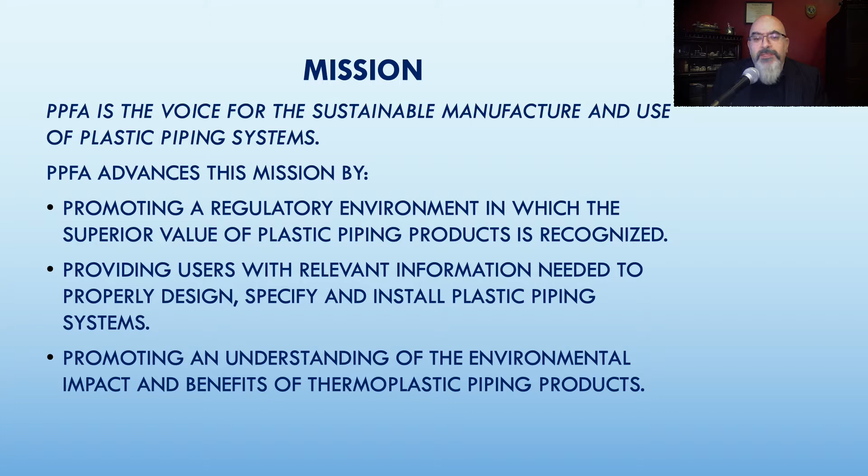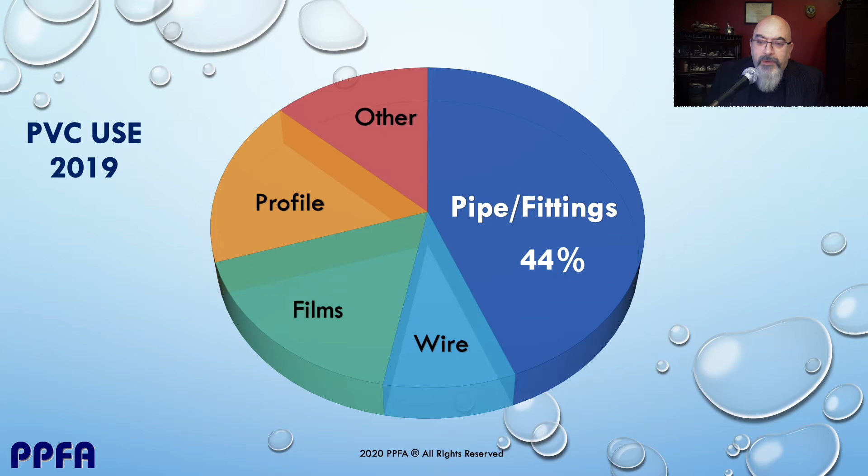Plastic piping is a major long-term sink for PVC and other plastic resins, using nearly half of the PVC in the U.S. PVC as a material is perfectly suited to this application. It allows for a precise extruded rigid pipe with quality solvent welded joints with numerous advantageous properties. With continuing interest in recycling and growing interest in the circular economy, it is certainly worth exploring for our industry. There are both issues and solutions.

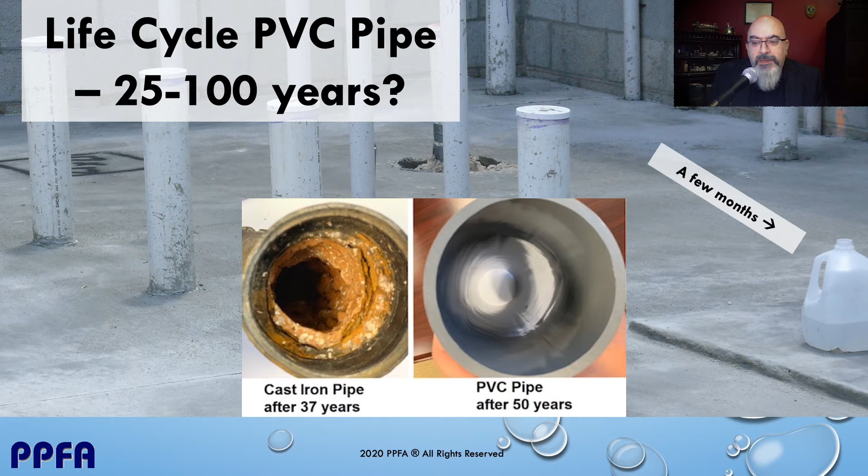PVC piping compositions also have a relatively rich, consistent, and simple thermoplastic formulation, as the product must perform under literal pressure for decades, and much of it is utilized to convey high-purity drinking water. As such, it is a highly regulated and certified PVC product with only a few well-understood ingredients and not much variability.

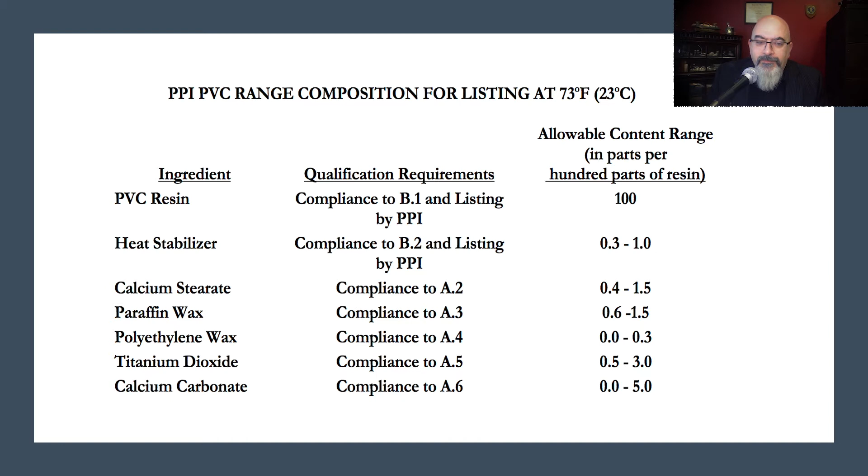This leads to a simple thermoplastic recyclable material consisting of mostly resin and some simple fillers, approaching 98% in the pressure pipe. This is nearly all resin with some calcium carbonate, waxes, heat stabilizers, and titanium dioxide. Calcium carbonate usage is lowest in pressure pipe formulations and generally highest in conduit type piping.

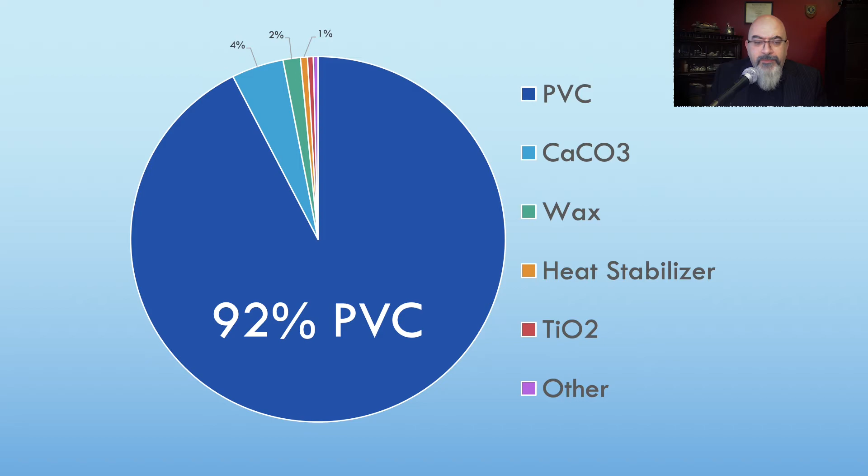Plastic piping is generally not stolen, and since it's still in use, you don't see much post-consumer scrap. Installation scrap is also rare because you can always utilize a short segment of a pipe. For DWV, for example, the fittings are a surprisingly high 20% by weight because turns and connections are so frequent in order to achieve the geometries needed. So even the short pieces have a job site use.

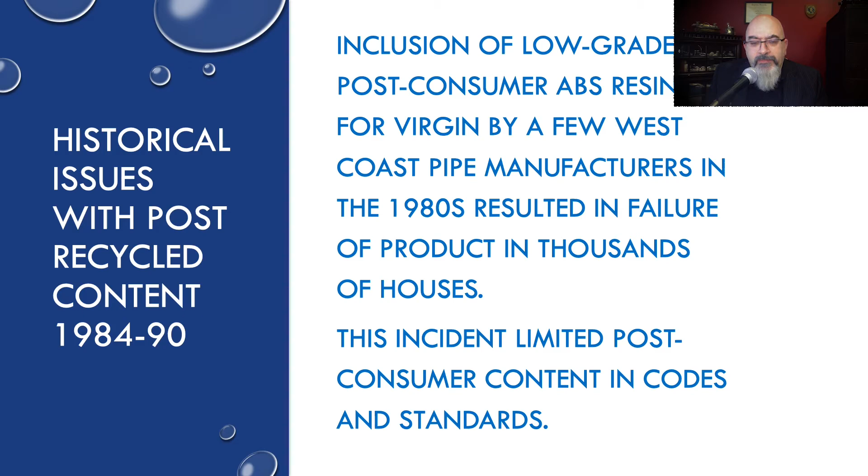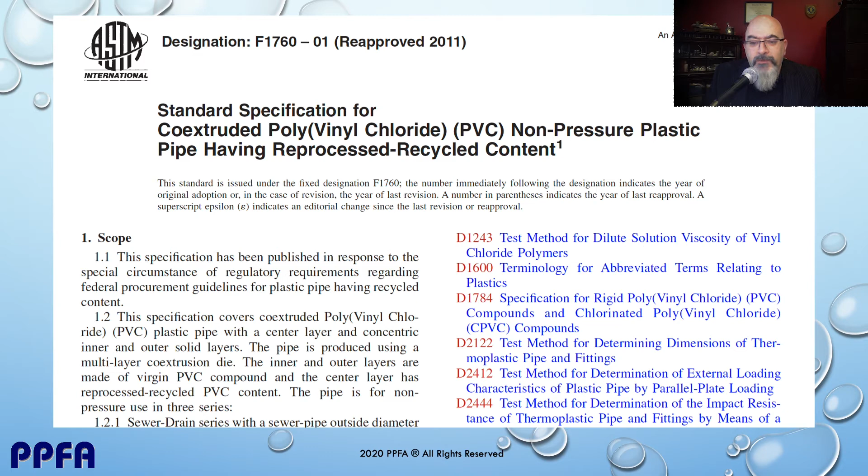To address this valid concern, consensus standards are the way to go. ASTM F1760 is a standard for PVC pipe containing recycled content, including post-consumer. It is a co-extruded 3-layer product. ASTM F1732 is another standard. These standards set the requirements to produce consistent quality products suitable for the applications.

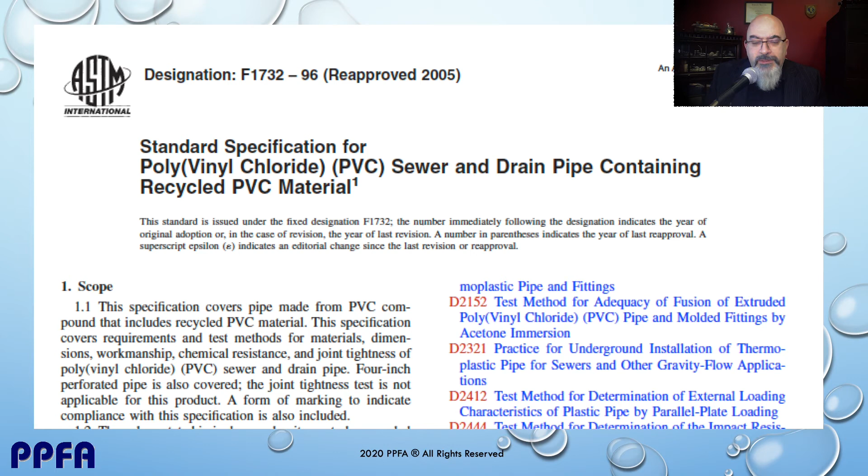The European market also has similar co-extruded PVC piping materials. Generally speaking, the inner and outer layers of the pipe are virgin, and the center layer contains the recycled materials. The European product is a slightly granular cellular core, and the ASTM product a solid wall co-extruded pipe. If the scrap used is a good quality siding or window extrusion material, the F1760 pipe can even have improved qualities over the usual pipe compound.

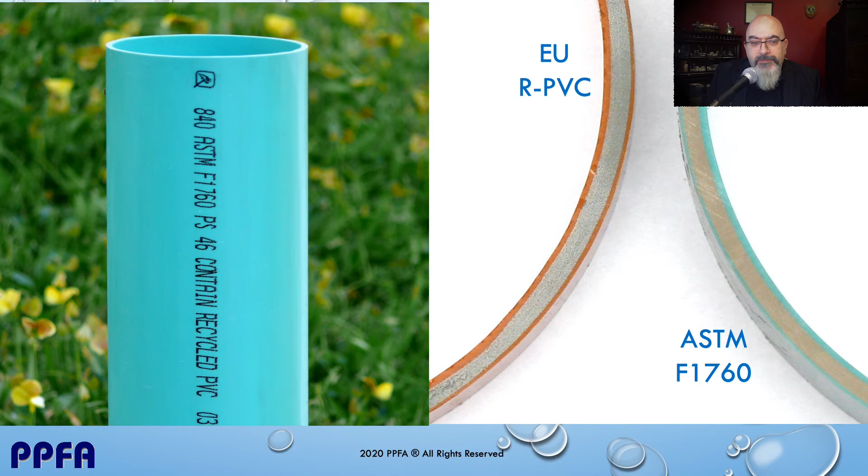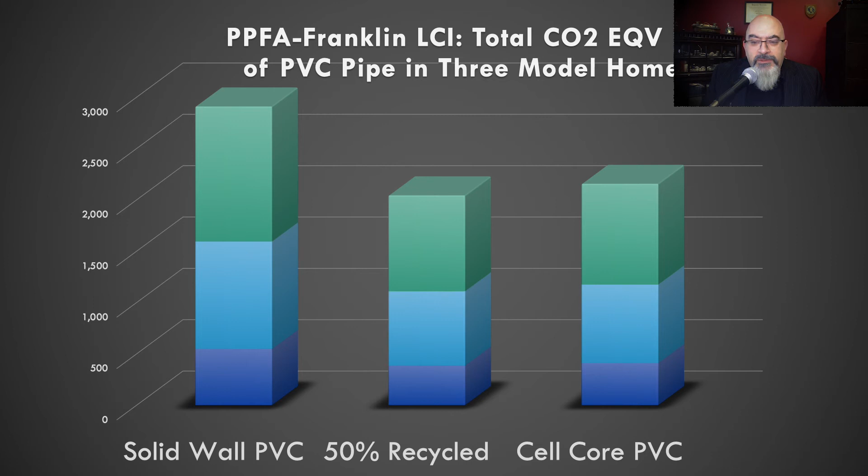The post-consumer recycled material may comprise up to a maximum of 60% by weight of the center layer. As more experience is gained with process and materials, this standard may be amended to increase that percentage. Another interesting aspect is cellular pipe. You get a product suitable for non-pressure applications and environmentally has impacts similar to a solid wall pipe with 50% recycled content. So this means you can have a more environmental choice via design.

We asked our members for a recycling update, but didn't get too much new information on recycling. We had feedback from the following 7 companies. Not surprisingly, there was concern over potential field failures if scrap is used. These are from past lessons. About 5% of annual production is recycled at one plant due to line startup issues, production scrap, and shutdowns. But in-house recycling rates for those materials are 98% plus, and almost all is reused in-house.

One facility reported acquiring over 10 million pounds of external recycled material per year. Returns from the job site are recycled at one plant, but it is only a very small quantity of cut-off material.

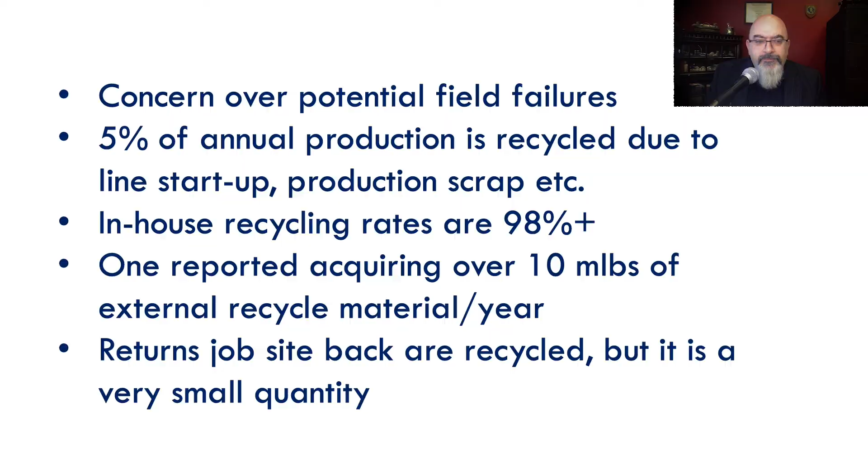In summary, in-house pre-consumer use is a standard practice in the piping and fittings industry. But we do have historical issues with post-consumer materials causing significant issues. Specific standards are developed and utilized for controlling recycled content, typically in non-potable, non-pressure pipe: drain, waste, vent, and conduit pipe. Most PVC piping product is still in use.

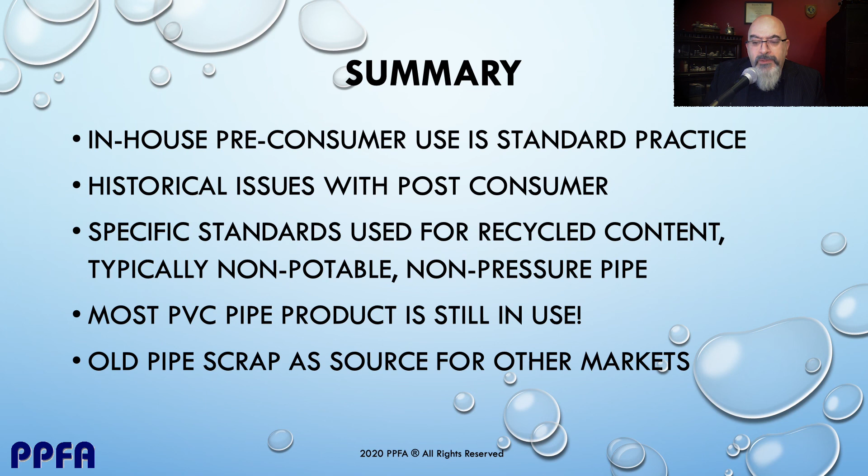Other PVC market materials such as profiles, windows, and siding may be better off to utilize scrap pipe than the reverse. Old pipe scrap, both PVC and CPVC, might be a good source someday for other profile markets.